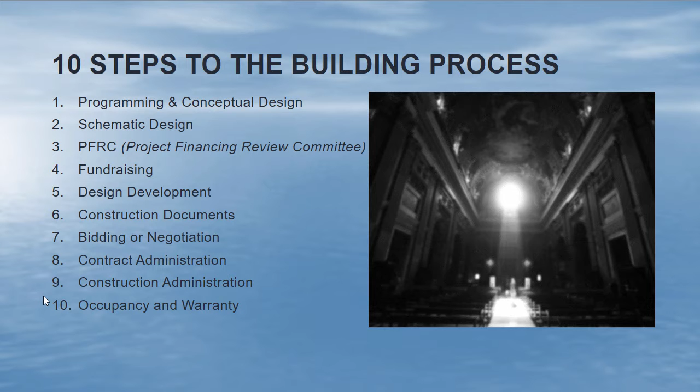So in the programming and conceptual design phase, there are several different approaches to developing the program. The program becomes a program booklet which documents all of the discussions and everything we've heard and listened to from the parish leaders, the priest, the bishop, or even building committee members. Now, there are several different approaches to developing the program.

We can work with parish-wide workshops where we have like 6 nights where we'll open it up to the entire parish in a town hall style gathering where everybody can voice their opinions and put in their 2 cents on what the parish needs or what they feel is the future goal and dream and vision of the parish.

We can also work with just a building committee where we have just a few key parish leaders who meet and discern what is going to happen with the parish building project. And then there's also a method where we work one-on-one with the priest, bishop, or key leaders and develop what the program and needs are of the parish. Now, there are pros and cons to all of these different approaches, but the key to all of them is that we listen while we document, study, and advise.

So let's go ahead and dive into what a programming booklet and the outcome of programming looks like, and I think that'll give you a better understanding of what the programming and conceptual design phase entails.

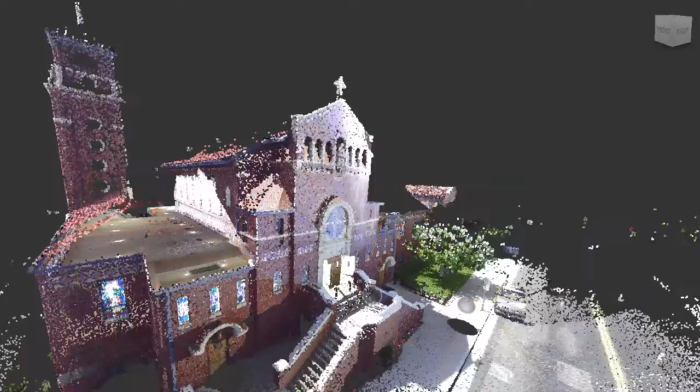All right, so the first step in conceptual design and programming is to actually document what exactly you have in your existing facilities. What you're seeing here is what's called a Lidar or point cloud documentation of a church we're working with in Colorado. We spend about a day or two measuring the building, and it sends lasers around the entire building and captures the accuracy of the building down to the millimeter.

So we can virtually take the building back with us to the office, and we can work virtually anywhere. And if there's any measurement or dimension that we missed while we're out on the field, we can quite easily just draw a tape measure on here and snap from here to here and measure. This is in meters, but you get the idea.

So the beauty of this, not only is it amazingly cool technology, but it does allow for us to generate much more accurate as-built drawings. And an as-built drawing is basically how it was built.

We'll normally find, specifically in a lot of our older buildings, that the documents are very rough or non-existent. So being able to generate documents of the building exactly how it is and where things are as it got built is very critical to starting with accurate drawings. So when you're beginning your project, using this kind of technology allows us to start with a proper and accurate ground zero.

So after we've gone through the programming workshops, we'll generate a final product, which is the programming packet. This is an in-depth document that shows all the research and input that parishioners have put together, and it also shows several ideas of how a project can be developed. So this would be something that would be handed off to an architect at this point, and it becomes the business plan for how we're going to proceed forward.

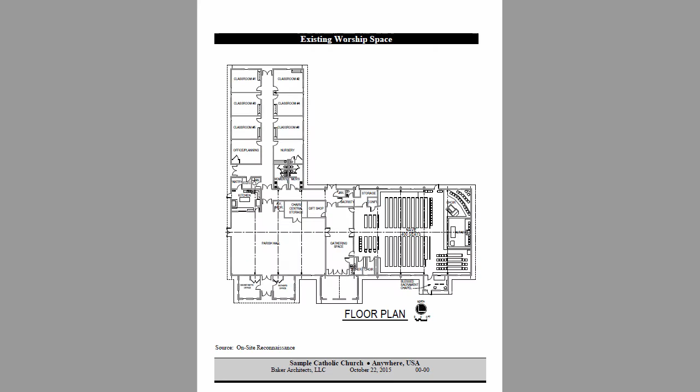And then from here is where it starts to get exciting. We start to look at the existing site plan and all the information that has been measured through our reconnaissance missions during the programming, and we'll start to draw existing elements and show what everything has.

In order to know what you need, you need to know what you have. Usually you'll find there's a lot of discrepancy between what people think you have and what you actually have. Here we'll have a summary of all the square footages and information about each one of those sites.

We'll also do a review of the zoning requirements so that we know we are meeting the proper setbacks, height restrictions, and parking restrictions for that site.

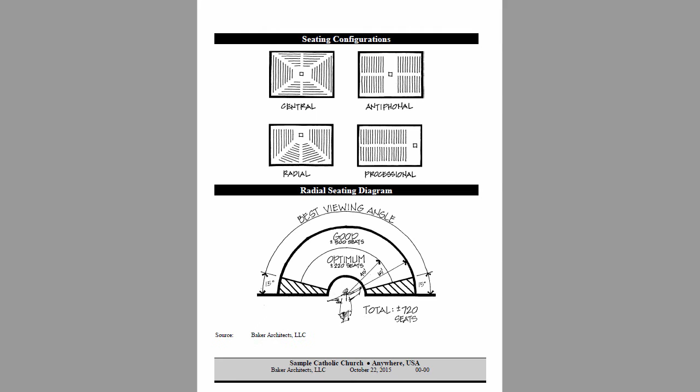At this point, we start to design the possible elements just based off the square footage, and we do a little breakdown of cost assumptions for how we're going to be building these worship spaces.

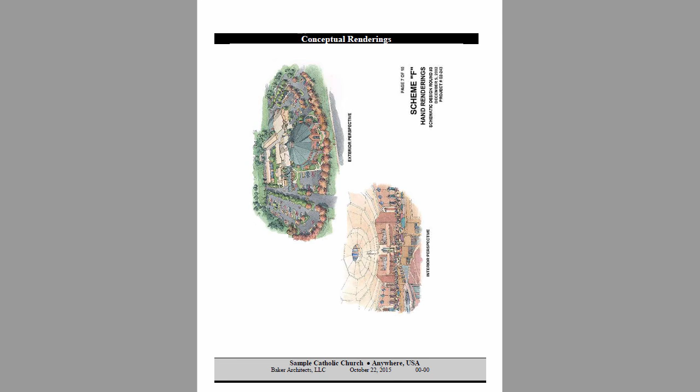From here, we can generate conceptual renderings of each one of those spaces, and then we'll generate ideas of each space with numbers, how much it will cost, and how they will be paid for. You can see the different layouts of the different information inside of there.

So that in essence is the outcome of the programming workshop. It is a book that helps you understand what we all agreed upon and explore different ideas of how they can be approached. From there, we can move on into our next step, which is the schematic design, where we actually start to put flesh onto the bones of these ideas.